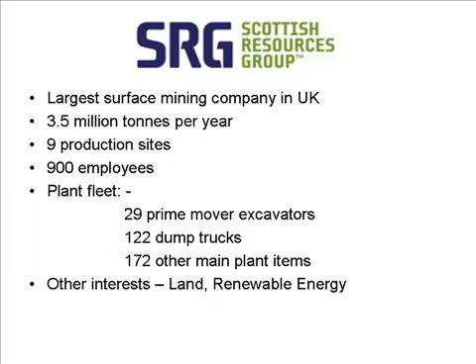The site itself is in Dalmellington, East Ayrshire. Operations commenced in 1987. It's a 24-hour, 7-day-a-week operation, producing 700,000 tonnes of coal per year with 130 employees. Now they've given me a plant list here, but it doesn't actually specify how many TR100s or 777Ds there are. But there are a significant number, because it'd have to be fed by 6 RH120s. There are a significant number of large plant on site.

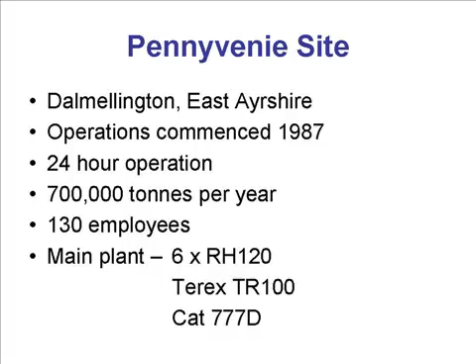Now, on the 26th of February 2007 at 1 p.m., 2 employees, a foreman fitter and a fitter, were killed, crushed to death, when the Land Rover they were driving was run over by a Terex TR100 in the dig area. I should add that it's taken this long to be made public simply because it took until late 2011 for the civil cases to be settled. So it was only when they were settled that we were able to produce this presentation and roll it out.

Right, what happened? The fitters were clearing a loading zone for a non-critical inspection on the RH120. That is important, the non-critical, because actually they didn't have to do it. I don't know what the inspection was, but they basically decided to do it because they happened to be passing the machine at the time. The fitters didn't have a radio, they were using hand signals. The Land Rover drove past the stationary dump trucks, there were 2 of them, on their offside. There are some photographs and videos, so you'll be able to see exactly what happened in a minute.

The Land Rover parked in the Terex TR100's blind zone. Now you might think, with the way we deal with all-round visibility today, that there wouldn't be a blind zone on a machine like a TR100 or even a Cat 777. We'll look at that a bit more in a minute.

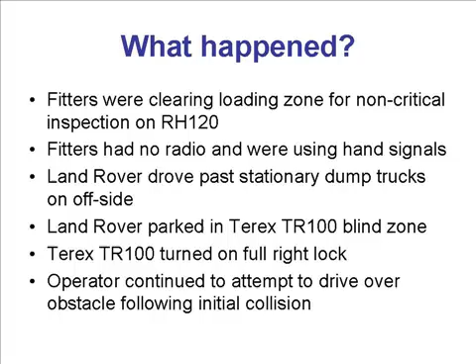The Terex TR100 took off from stationary on full right lock. The operator felt a restriction in movement, but he backed off and had another go at what he'd hit. He didn't know what it was, trying to drive over the obstacle. The obstacle, unfortunately, was a Land Rover with 2 people in it.

Sorry, I forgot to move that on.

RH120 was up on the top of the dig. He was cooled down so that the fitters could have a look, because they wouldn't obviously do any work up there. So that's the lie of the land.

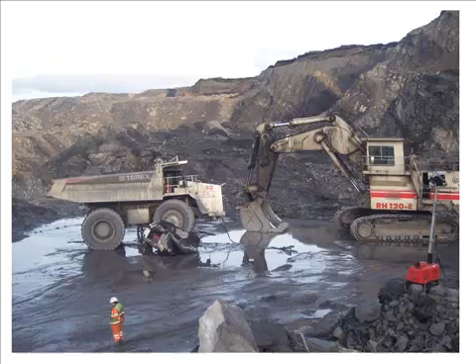This is a photograph taken shortly after the accident. We make no apologies for showing these photographs. There are still 2 bodies in that machine, and that's what it looks like. A lot of people have a tendency to think, and even we have a tendency to believe this, that when the machine strikes something like that, it'll either push it forwards or it'll rise up so high that you'll know that you've hit something. Well, of course, that's not what happens at all.

The thing's just so heavy, it just goes straight through it, which is what's happened there. The machine is unladen, by the way. It's not a laden machine.

There's another photograph showing what happens to a Land Rover with a TR100 parked on its roof. The hawser on there was put in place because they tried to lift the front of the machine up using the excavator. But unfortunately, that had to be abandoned. He couldn't do it. It was also plainly obvious that the 2 occupants of the Land Rover were already dead.

Following the accident, emergency procedures on site were instigated. I've already said that preparations to move the truck were abandoned, A, simply because they couldn't lift it, and B, it was obvious that it was too late anyway. The emergency services were on site within 20 minutes. There was a police investigation.

Scottish Coal undertook a detailed survey of the area. The bodies were finally recovered at 10 p.m. that evening. Obviously, HSE were informed, the investigations began, and Scottish Coal undertook a full reconstruction of the incident, along with ourselves.

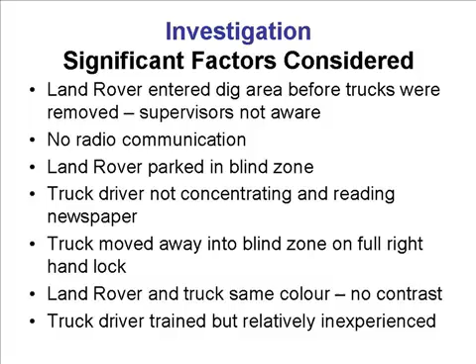On full right lock and moved into his own blind spot. The Land Rover and the truck are actually the same colour, so there was no contrast between them that would have alerted the driver to the existence of the Land Rover. And the truck driver was fully trained, but he was relatively inexperienced. I think he was 3 months on the job. So he had all of his tickets, NVQs, etc., but he was relatively inexperienced.

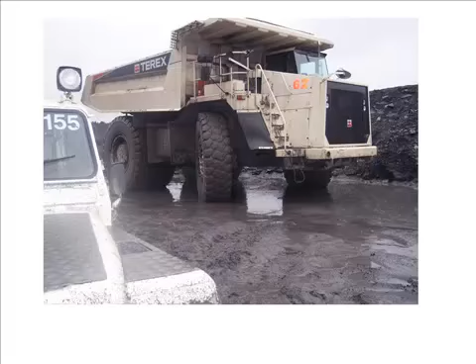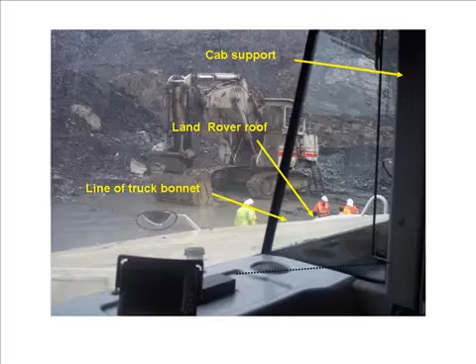However, if we look at this from the operator's point of view, you can see there is the roof of the Land Rover, just that little bit there. There's no way that the operator could see that from where he was sitting, even with his additional mirrors, when the machine was fitted with all of the additional visibility devices which we would have expected it to be fitted with.

It's not conclusive that he was reading a newspaper. It's a reasonable explanation as to why he didn't see the Land Rover draw up. There's no proof at all. Right, first video. This, hopefully, will show, excuse Dave Patterson's broad accent, but I hope you can get the gist of what he's saying.

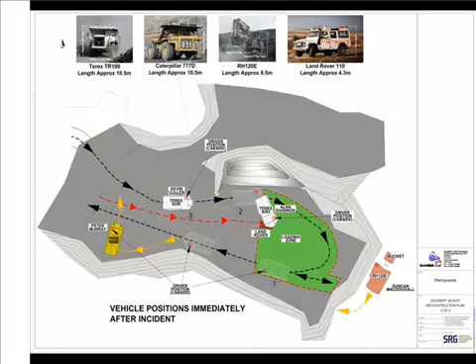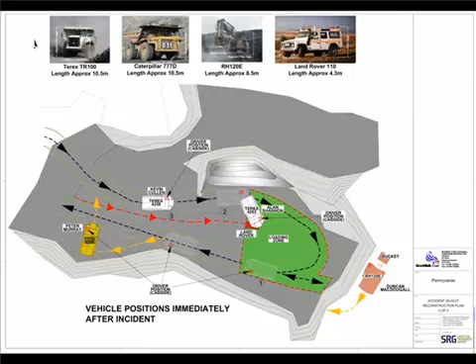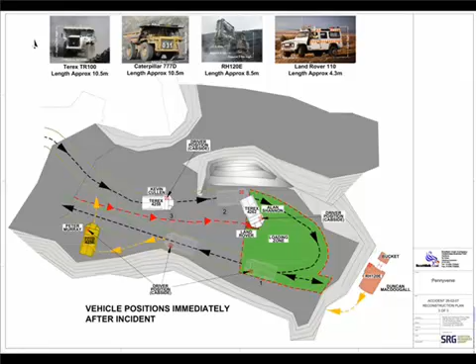Still makes my blood curdle every time I see it.

Right, system improvements. We'll come back to a bit more on visibility in a minute. They now have radios in all vehicles, and traffic management plans have been reviewed with new rules controlling entry into the dig areas. The supervisors now have vantage points whereby they can see across the whole of the operating area. They don't have to go down into the dig area. Full segregation of light vehicles with separate routes.

And another issue which you've probably heard of coming through your own companies, buggy whips on all light vehicles. Offside CCTV on all rigid dump trucks, but there's been another development on that which I'll also talk to you about a bit later. Improvements to the TR100 operator visibility and additional training with MPQC assessors and instructors.

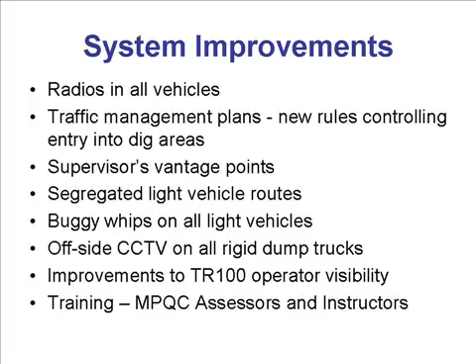Let's have a look at the visibility. Here we have the truck. This is before any improvements were made. And you've basically got the fire extinguisher and the battery box making a significant contribution to that offside blind spot. There's no reason whatsoever for them to be there, so they've moved them. Look at the difference it's made.

It's striking. It certainly struck me, because I don't know if you remember on that video how much of the Land Rover you actually saw going past the window was virtually nothing. There's a lot more there which could have caught the eye of the operator. Doesn't solve the problem, but it makes things a lot better.

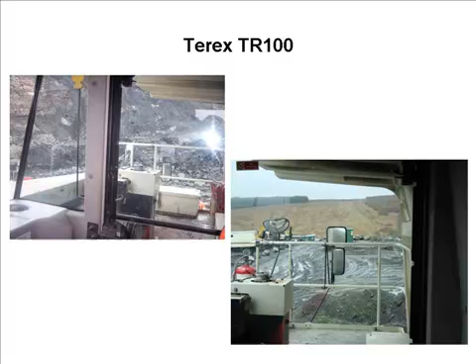They've also fitted an additional offside monitor. And again, I'll come back to some more developments since then. This is the trucks as they are now, not what they're trialling. You may have seen what they're trialling at Hill Head. You've got the rear view camera monitor and the offside camera monitor. You'll also notice that they've been carefully positioned so that they're not in a blind spot. The bonnet of the machine is behind them, so they don't contribute to any blind spots.

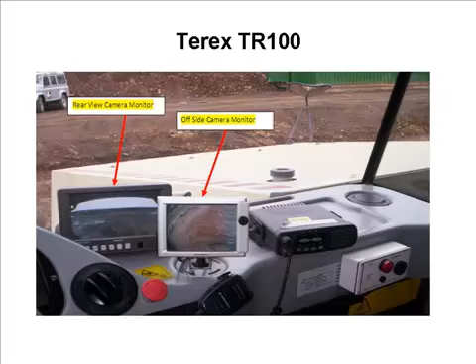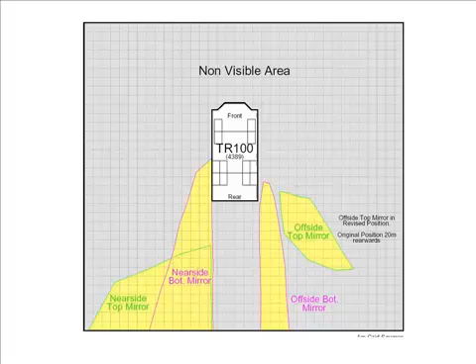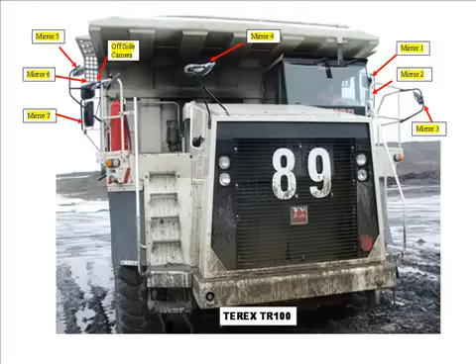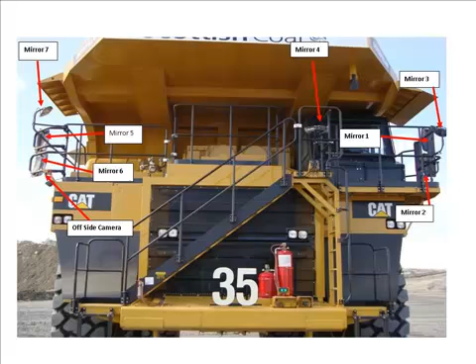Exactly the same situation on the Cat machines. Again, consistently numbered mirrors and the 2 cameras fitted. They've also introduced what we said before, the light vehicle segregation. Here you've got the standard 3.5 times width carriageway with a bund and then a separate carriageway for light vehicles.

Now we accept, and everybody accepts, that not everybody is going to be able to segregate light vehicles in that manner. What this is suggesting is where it is practicable to do so, it's a very, very good idea for all the reasons that we've mentioned. So where there is room to do it, we ought to be doing it. Where there isn't, we need to have more robust traffic management systems in place, even to the point where, if it's a practical proposition, to stand up the large vehicles while the small vehicles move around them.

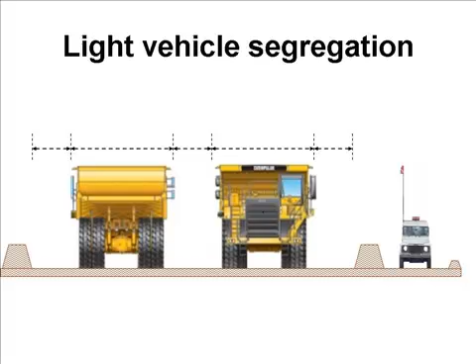And one thing that is extremely important when you introduce radios, and I think this is something which the traditional quarry side of the industry probably didn't have so much issue with, but I do know that the Opencast did have 1 or 2 issues with this because they'd had trouble with people basically chatting and messing around on the radios. You do need to have a robust radio protocol to ensure that the radios are only used for the correct reasons.

And another thing that's extremely important is to make sure that each machine on site is easily identifiable and the operator knows what machine it is he's driving, because they may not drive the same machine every day. In this case, it's perfectly clear that if we put a call out over the radio for machine number 35, everybody knows what machine number 35 is. The operator knows, everybody around him knows, and they will be prepared that this machine may well stop because it's been called up on the radio.

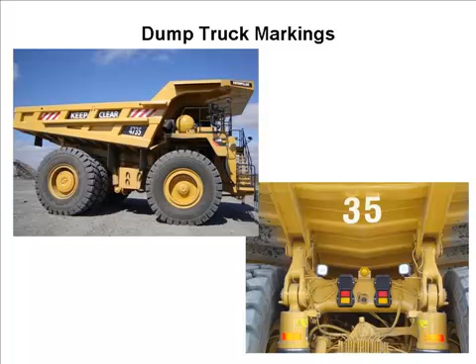Now, the consequences for Scottish Resources Group. 2 prohibition notices, 1 for no entry of non-production vehicles into the dig area, and 1 for the non-use of dump trucks without radios. A prosecution under sections 3 and 33 of the Health and Safety at Work Act. They were fined a total of £400,000 with full costs. A fatal accident inquiry which took 35 days in court.

The civil claims, which have now been settled, substantial production, management and legal costs, and of course consequential loss of reputation. Now, Scottish Resources haven't disclosed how much the non-insured or the additional costs actually are, but I'm led to believe that they are into millions. So that accident cost them an awful lot of money, quite apart from the other impacts that it would have had on people on site.

This is the sheriff's determinations. He said these precautions could have been taken which may have prevented the deaths. There should have been radio communications. This is where the sheriff picked up that the truck driver should have paid attention and not been reading a newspaper. Now that is actually what the sheriff said, although, as I said before, I don't think there is the evidence to say that he was reading it. There is evidence to say he could have been.

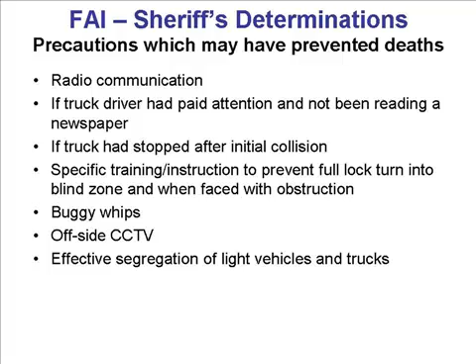Buggy whips fitted to light vehicles. Important issue with buggy whips, by the way, is that wherever possible, the flag should be positioned at the eyesight line of the driver of the largest vehicle on site. It's fairly obvious, but that's where it should be. And in fact, the illustration earlier on shows it's slightly too high. Where are we? That one. That buggy whip's actually too long. So it's a little bit out of scale.

Right, other relevant factors. It talks about the failure to learn the lessons from the 2005 incidents. There was an incident at a Scottish Resources site in 2005 where a Land Rover was hit, but there were no injuries. So they say they basically failed to learn the lessons there. Greater emphasis was required to alert operators of the consequences of reading newspapers.

Now actually, moving away from the idea that we all know we've got radios, etc. in cabs and machines, there's actually a lot to be said for the fact that people operating machines actually shouldn't be listening to radios, because it could be seen as distracting. Now I know that the counter argument is that it's boring as a job and it gives them something to occupy the brain, if you like, while they're doing what is effectively a mundane, repetitive job. But these people operating these large machines, or any machines on site, the other argument is you need your wits about you all the time.

But then again, there is another counter argument that says we all listen to the radio when we're driving our car up the motorway. So I'm not going to come down one side or the other on that one, but it is an interesting observation that somebody made.

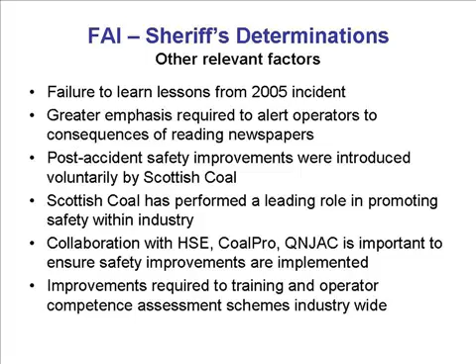Right. Sorry, I've gone ahead of myself there. I went ahead of myself there as well, didn't I? I do apologise.

These were additional other factors. This was the HSE: consider mechanisms for more efficient dissemination of best practice identified by inspectors. Well, again, the sheriff would not have been aware of things like QNJAC and how QNJAC operates. And I know from Mike's talk earlier on as well that the industry itself isn't as aware as we would like it to be on QNJAC, and that's our fault, or QNJAC's fault, and there are plans afoot to address that.

HSE should inquire about radio use and traffic management during inspections. We do, and we always have done. Those of you who have been inspected by inspectors will know that traffic management has arisen from time to time. Consider updating the Quarries Regulations and ACOP to address issues, segregation, blind spots, radios. That is a political issue. The regulations will not be updated. However, the ACOP and guidance, as I said to you this morning, is being updated.

However, there is a feeling that it isn't necessary to point specifically to radios, because the problem is the Quarries Regulations have to relate to all quarries and not just large opencast sites. It may be that in a small operation with perhaps one bendy dump truck running from a face and a simple sand washing plant, something of that sort, hand signals are perfectly adequate.

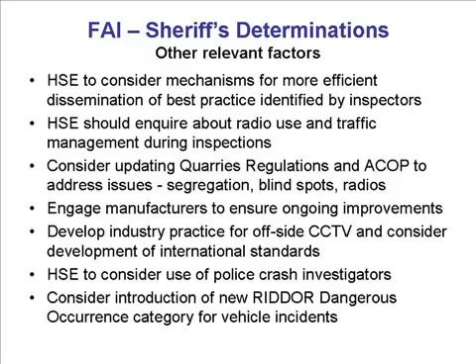HSE to consider the use of police crash investigators. Well, we would if it was necessary anyway. That would be an ongoing. Consider introduction of new RIDDOR dangerous occurrence category for vehicle incidents. Well, that's not going to happen because Löfstedt has already said that RIDDOR's got to be simplified. So I can say that is a non-starter. That's not going to happen.

Just to give you a timetable of the events, so that you can see why things took so long to get sorted out. The accident happened in February 2007. The charges were laid in July. Scottish Coal pleaded guilty and were fined in August of 2008. The fatal accident inquiry didn't commence until August 2 years later, and that's down to the procurator.